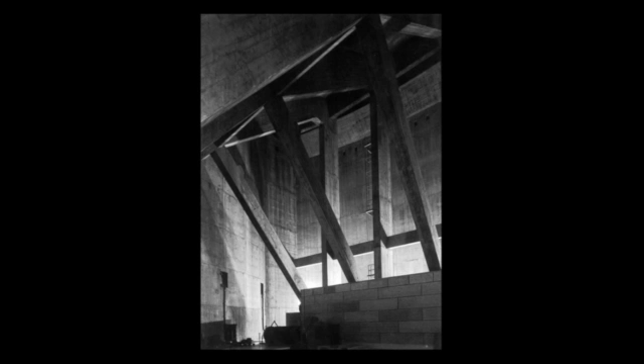And also this space here, which is inside a power plant, looks maybe like out of a movie from Josef von Sternberg, with these very strong black and white contrasts.

These walls, which are all bended, this one here is bended in a different way than that one, and this wall here is becoming a roof which is held on these massive columns. And it nearly looks like an expressionistic interior design.

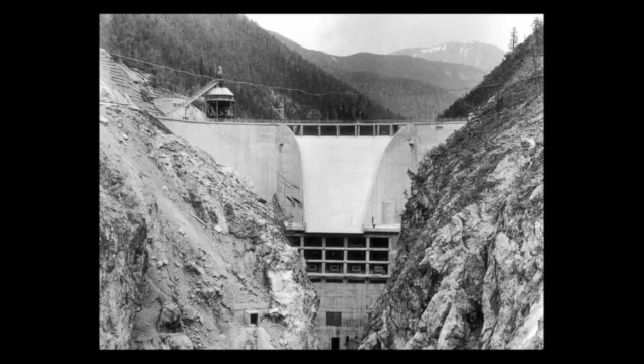But once again, there are totally rational rules why this interior looks as it looks. One is the wall on the back is the retention wall of this lake. And the other wall is actually like a waterfall, because if they have too much water, they will just drop the water over this engine hall, which is the actual power plant, built within or just behind this retention wall.

So this space is a pure consequence of totally rational, logical, economical decisions. But not only that, it is also giving a conceptual strength to this building. And this attracted me very much to these buildings of engineers. But I would say only the approach through these rules, or through the knowledge of what stands behind these aesthetical objects, makes them interesting to me.

These pictures were also done in the 80s in Switzerland, where there was a big debate about sensual architecture and about the perception of architecture. And then there were just very few private houses who kind of put this discourse into practice. Of course, this totally changed in the 90s and later on.

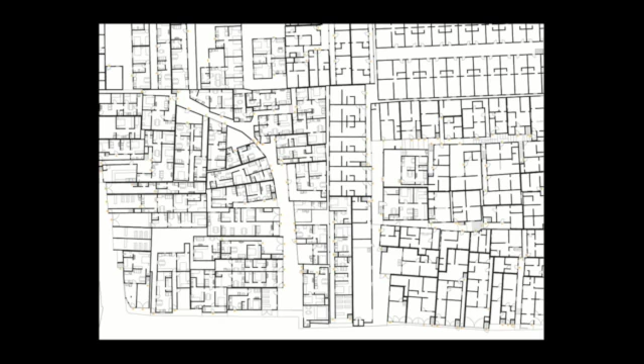How people living there organize themselves, how they organize the approaches to the house, and so on. So we are now studying and working on the question: what are the formal rules in the so-called informal settlements?

So, there are a lot of reasons why favela should not just be regarded as the reason for drug traffic and other social problems.

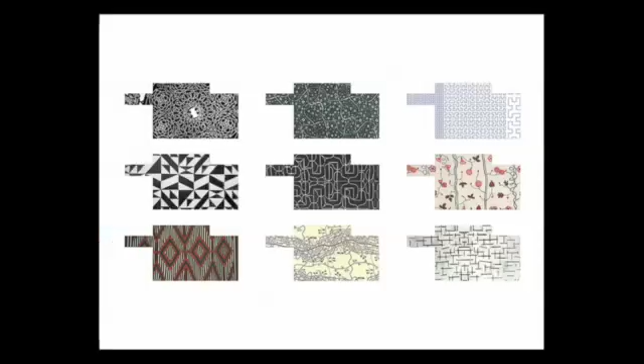Don't ask me why, so we thought in a different way about this social housing project. We thought it's maybe nice if these spaces are random, but they are connected and they could be repeated, like in an ornament of a carpet or a kimono, or in a painting.

This is from Mondrian, Joseph Frank. This is an ancient kimono, and the idea is that maybe the urban space could be much more organic or much more differentiated, but still follow a certain pattern, a certain structure.

This is how we started. This is more or less a study for density. Actually these are all single-family houses, which was not possible, as you can see here. So we introduced some houses where you have one apartment on top of each other, or also some apartment blocks.

And if you arrange them as you saw in this density study, you would get something like this, which, why not? It's also a nice pattern, isn't it?

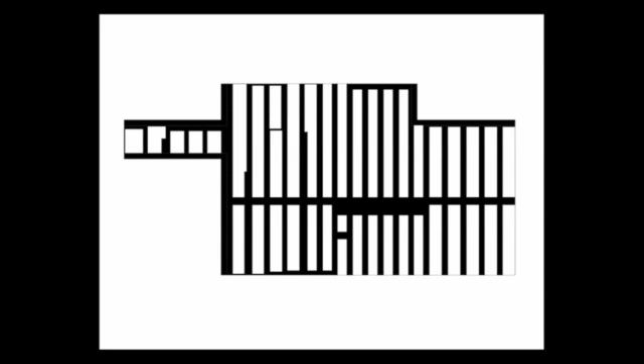But if you think of this pattern in terms of what could be the meaning of this outside space, and for example you think, well maybe these are private spaces, these are public spaces, then besides two or maybe three leftovers, you don't have a lot of variety. And you don't have a lot of generosity. Every garden would be very narrow and close to the next garden.

So we thought maybe it's nicer to have a different arrangement, like this one. I don't know how to call this order. Maybe it's not really an order.

But if you look at it, or if you imagine that this outside space could consist of private alleys, private gardens, public alleys, public squares, then you see that this option offers much more variety in spaces, and also offers more large open squares than the other order. So I would say there is also a clear advantage in this arrangement of houses.

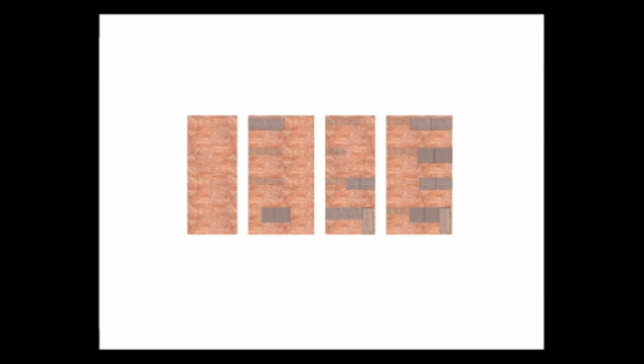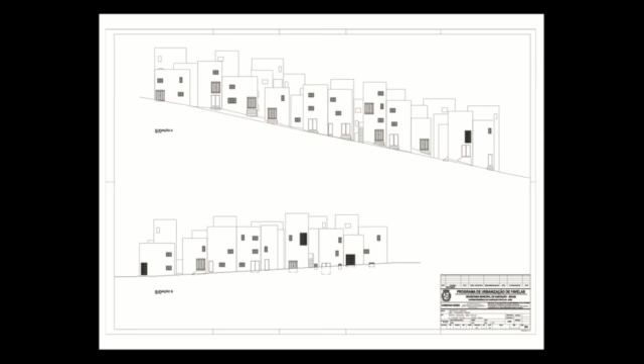Now we are working on the building application. This is a calculation for areas for handicapped people and for public squares. And this is a first impression of the facades. We hope to finalize this building application within the next 3 weeks.

And the area is very nice. There are a lot of trees and gardens. There are also some houses. They are not so nice actually. But...

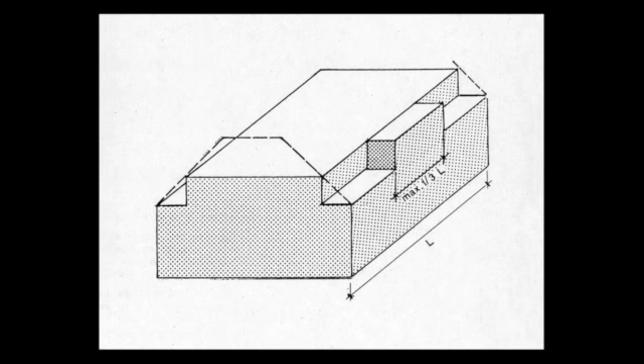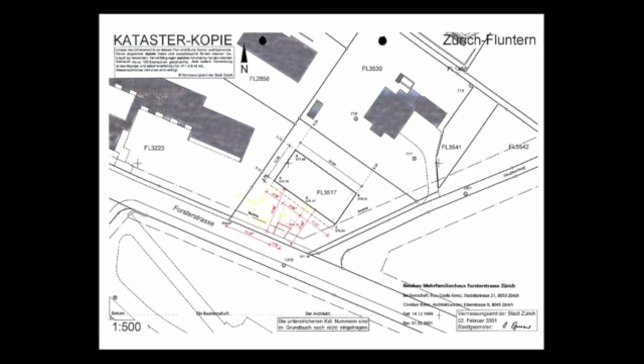This is the building application. The only choice we had was to make a rectangular form, like the other buildings, a box, and that the longer side looks to the sea, to the lake. And the whole design actually became like an interior design because the shape was given.

So the idea was to not stay within these boundaries and accept a given volumetry, but to not think of this house as a volume at all, but just as a structure.

One of the rules for this house was also to kind of escape the given boundary in many ways, not only by not having any facade made out of massive walls but only made out of glass walls, but also to have the biggest extension possible in terms of views, so that you always see through the entire floor plan in every direction.

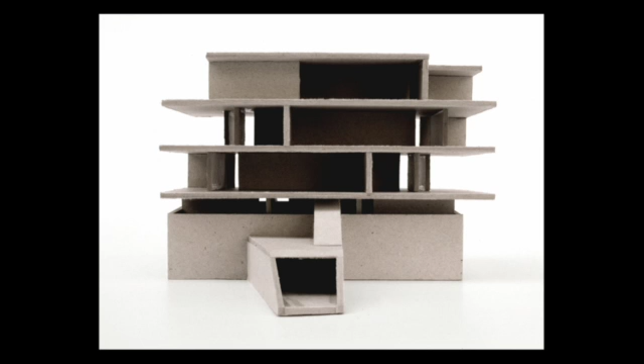And it also became very difficult work for our engineer. Actually, we had to change engineers 3 times. But now we have the best. His name is Joseph Schwartz, and he was really looking for challenges.

Since we didn't want to implement any other elements in this design, just walls, there was a structure where, for example, in this huge room, which is 12 meters long, you would need a column, but you don't, because this ceiling is hanging on this wall, and this wall is extended from this wall, and so on.

So all these walls are connected with each other. If you would change the position of one wall, you would have to change the position of all the other walls as well.

The floor plan which interested us the most was the cellar. Not because it is very important in terms of program, but because at the bottom you had a garage, and on top you had these apartments, and the big question was what to do in between.

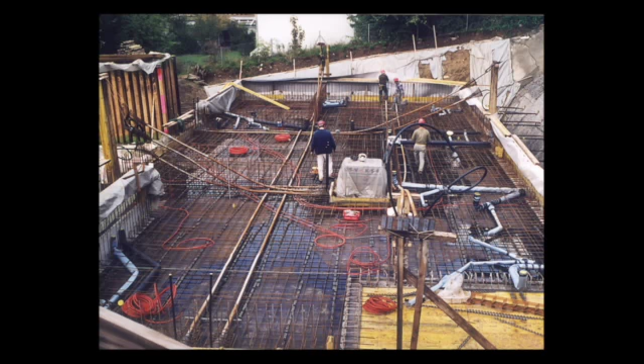And the cellar in this house is like a hanging bridge over a void space, so that this structure of slabs and walls is like put on the inversion of a podium, of a pedestal.

You see here all these pre-stressing cables which were important to hold the walls and to stick it to the outside wall. And the cellar was also like the breaking point, where maybe this house is not anymore faithful to its own rules, and it's just, let's say, decoration of what you see on top, but you don't think about what is really the basement, the fundament of this house.

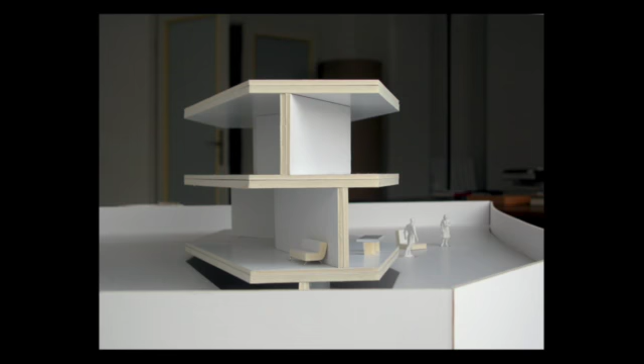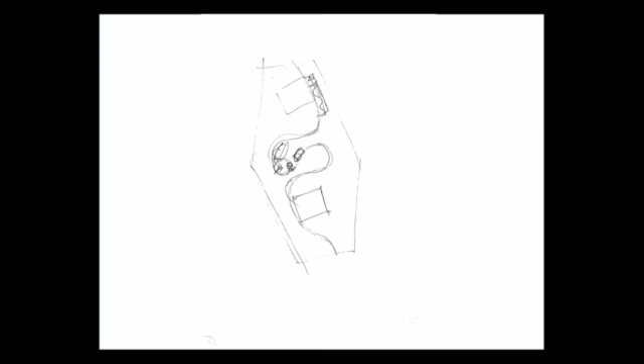You could even say this project is so simple, you just have to draw a line and then it's finished. So I was hoping somebody would do it for me. This is one example. Maybe a curved line would be nice. But then there's a little problem: a fire escape stair can never follow a curved wall, so it doesn't work. Nice, but it doesn't work.

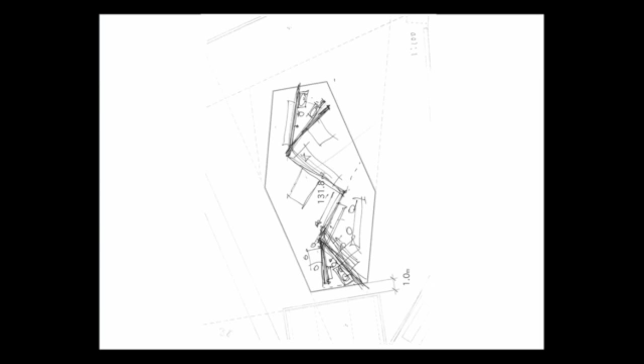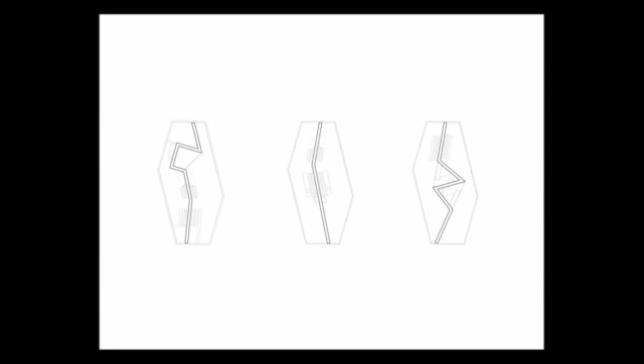So we thought maybe it would be interesting if this wall didn't always just cut the house into 2, but was more elaborate. But then these spaces were too small to be useful. And so on and so on. There were dozens of variations just of this one line. In the end, this was the floor plan after, I don't know, 3 months I think.

This is the living room, which we thought should be the most generous space. So the bending is the slightest possible, so you have as much space as possible. But of course, because it's a small house, it's only generous in 1 dimension, not 2, not 3, just 1, the length.

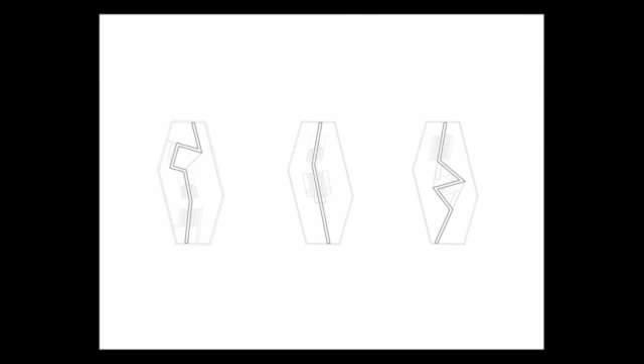This floor plan was very different because it also had to find a place for the bathroom, here, which is a niche in this wall. These 2 floor plans were pretty clear for me, how they had to be. And the third one, at the end you have a technical space, some storage room, and the rest was just the rest, and the beginning of the house. Maybe the most important thing was the stair.

This is the last model we did, at a different scale, not 1:33 but 1:10, and instead of 2 kilos, it's 800 kilos. This is the outside, just some cladding with aluminium panels, where you have the structure, and the rest is sliding doors.

So in this design process, the most important instrument to create generosity was the staircase, connecting all 3 levels. The walls are always in the same position, next to the staircase. This is also, let's say, a very monumental gesture and perspective in an otherwise very small, very modest house.

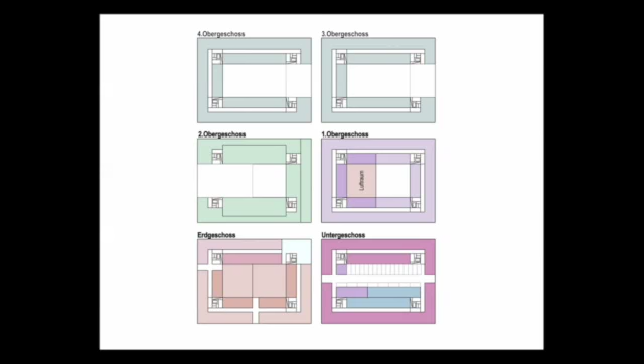This is the feasibility study that was given, and this is also how most competition projects in Switzerland look like. But not this one, I must say. There were a lot of very interesting entries.

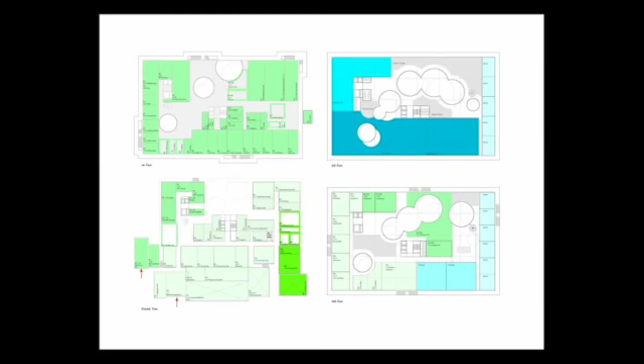So, as you can see, on the ground floor you have different workshops, and you only have very few openings. Then here you have research laboratories with already, let's say, 3 or 4 zenithal light wells. And then where you have the big auditorium, they are all put together in one area. So the position is always different from one to the other, and this also has functional reasons, so that we could implement, besides the given spaces, also open spaces where people could meet, also around these light wells.

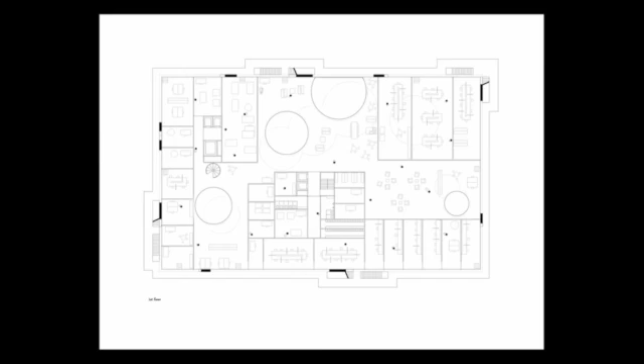This, for example, is the first floor for the management with meeting rooms with zenithal light.

And the structure is extremely simple. You just have pendulum columns on the inside. I show you this structure in a movie. Basically, it's just slabs and columns, that's it.

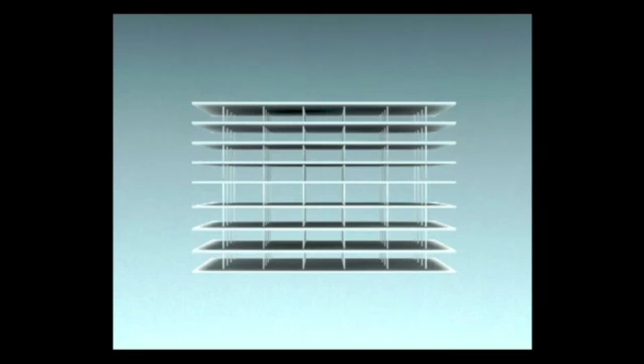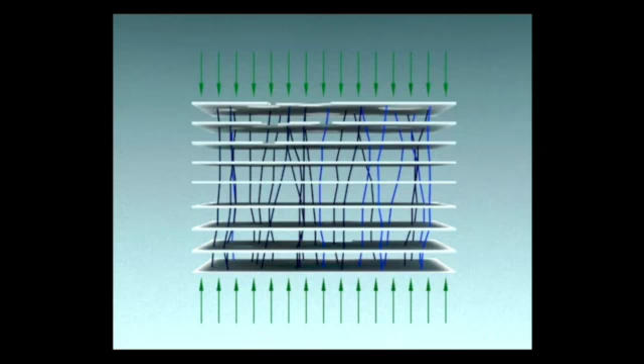But then you have these holes, and because of that you don't have any more straight columns. And because of this inclination, we thought it's better to have pendulum columns. But of course, they cannot stiffen the building. This is when the wind would blow.

So we thought we need also some columns on the outside, but these columns are totally different. They are massive, they are connected with the slabs, and they are also inclined, but for a very different reason. Here it's important that these columns meet in several points, because the more points you have where these columns come together, the more you can reduce the size of these inclined columns. And they also follow the direction of the fire escape stairs, which is outside the building.

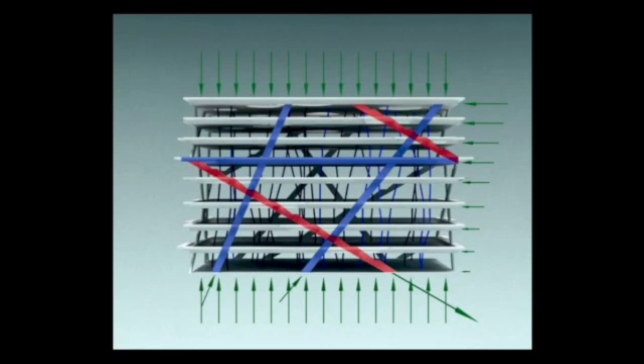This was one day before giving in the competition, and then we got a phone call from Schwartz asking if he could visit the office. We were quite stressed, but it turned out that we had a very distracting discussion about how irrational this project is that should actually be a Swiss engineering building.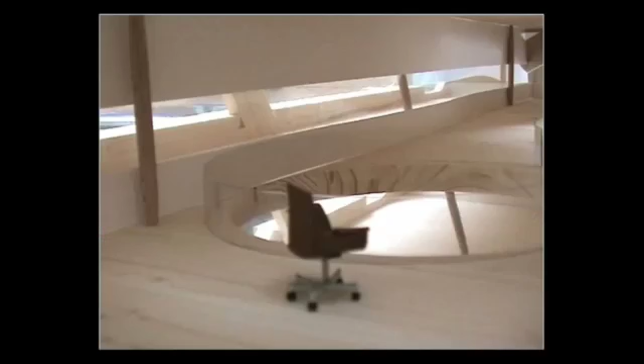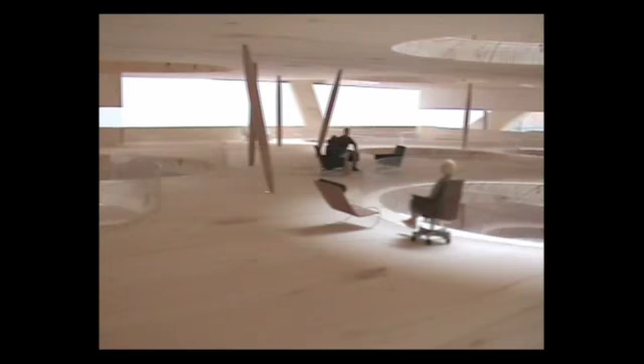And I totally agree, but I would say there are 2 elements in this project. One is the basic structure of columns and slabs, which is basically a very rational system, but then you have these holes, and these holes are totally weird, it's like if you shoot with a shotgun through a rational structure. But I think it also opens different perspectives in an otherwise very rational building. And I wouldn't know which aspect matters more - the rational approach of just slabs and columns, or this Baroque or surreal aspect of the building.

These are some camera movements to show how this space would always change the perception if you would move around it. They were done in very short time.

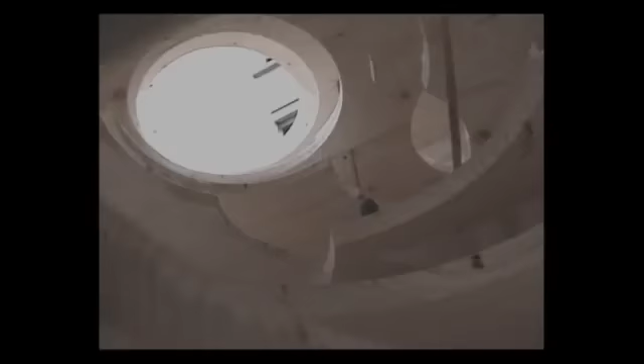But since I believe that you never can really know what the building will look like in reality, I hate renderings. I think these very rough sketches of the interior are maybe more faithful because they don't pretend to be reality. And it also gives a variety of impressions on each level of the same building.

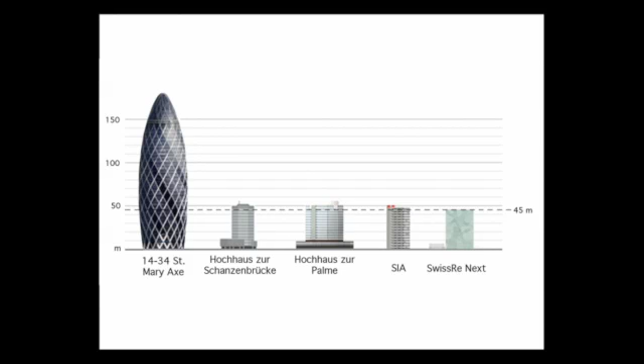But actually, what I wanted to do is this. This is from the same company, Swiss Re, a building in London by Foster. I don't know exactly what the symbolism is of that. But anyway, if you imagine that this is kind of not the headquarters, but this should be the headquarters, it's very much a challenge - how could this small building become more important? I mean, scale is not the only thing.

So I thought it would be nice if we have on the exterior a structure which is not just one slab after the other, but which is a structure that goes over the entire height of the building, a monumental order, not an order given by these slabs. And also not an order like in other buildings that is just on the outside, just a structure of the facade. No, I thought it would be nice if this would go inside the building, and then I put these nails into the foam glass, like a voodoo model, hoping that something comes out of it.

We actually thought there is one element, and this is the core — the staircase, which you need in every building — which could develop from one facade to the other, then be reflected and turn again till it reaches the last floor. It's like if you play pool and the ball is reflected by the borderline, because the stair cannot go out of the building and then come back. So it has to turn here. But this is the biggest possible extension you could have with a staircase.

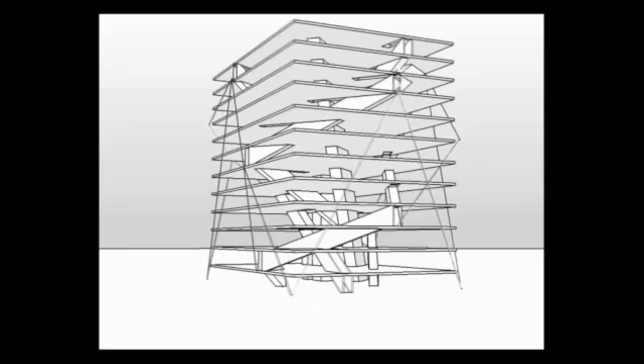I think, yeah, we decided for that one. I think it was the fire police who made the decision easy, so it's also not an aesthetical decision.

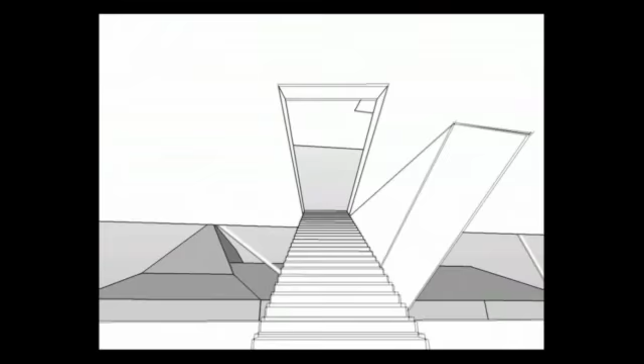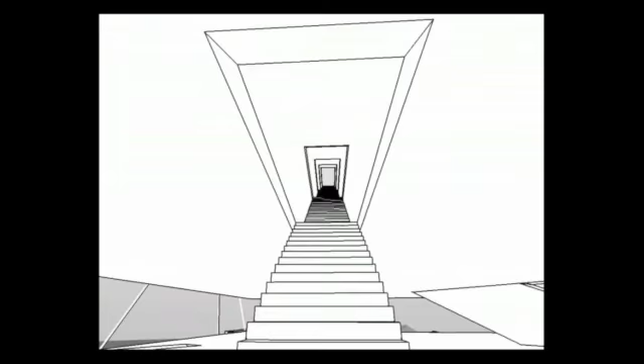Basically it's a very old principle where you have cores and then suspended wires on the outside, but here the cores touch the facade only at the last level. So the suspension wires are only in the facade, which is much nicer than all these 60s buildings. And if you are the manager of Swiss Re, you have a nice walk each morning — it's really like a promenade architectural. With a lot of training, you would have this speed.

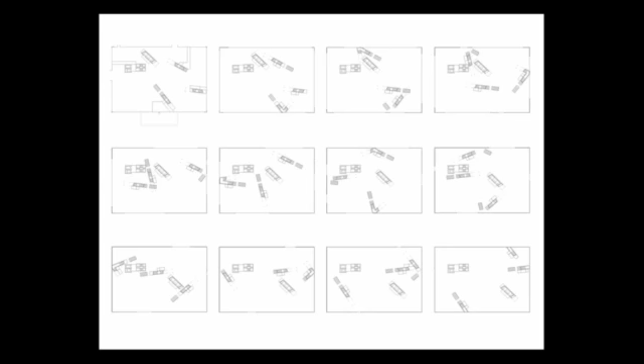Besides that, each level is different because the arrangement is also always a bit different. Each slab is like a fragment of the entire structure.

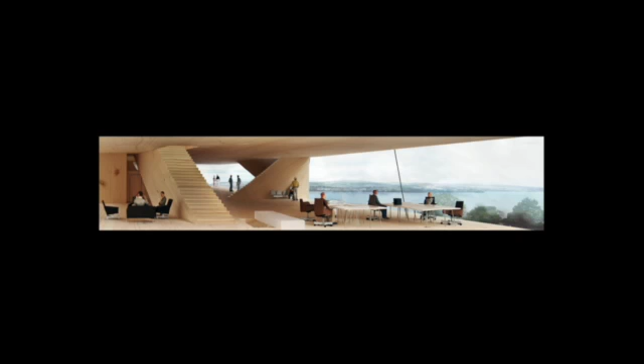That was again the model at 1 to 33, and you see here the steel wires holding the slabs at the exterior, which would allow you to have a view over the lake of Zürich without any disturbing columns. This totally open view would relate to this very heavy cores in inclination.

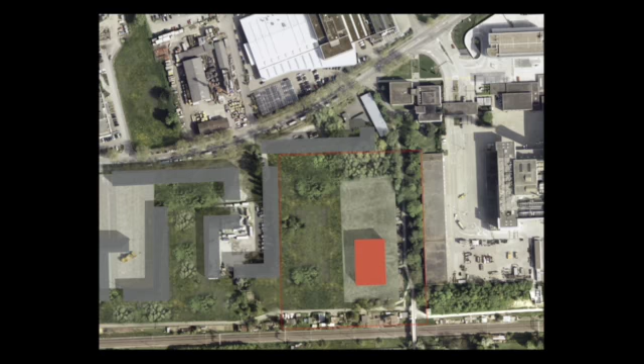The site of the school in Leutschenbach was actually, at the beginning, huge, and the neighborhood is quite rough. You have a power plant that burns trash, a speed train and traffic and so on. The only quality was that it's big, and to kind of keep this size, we were thinking of a way to connect all parts of the program with each other.

In one entire gesture, this steel structure already indicates all the parts of the program that you have. On the sides you have the classrooms. Here is the entrance with the cafeteria. Here public rooms, auditorium and library. And on top there's the gymnastics hall. They all depend on each other.

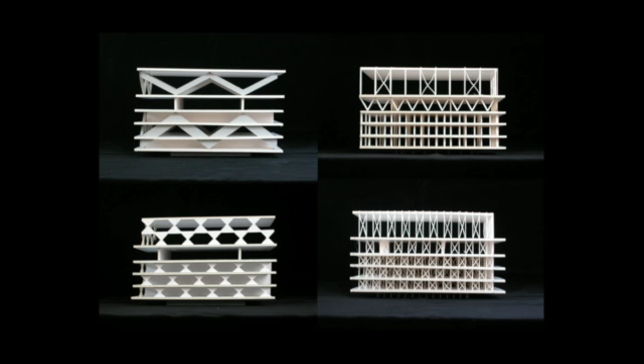It's not like a collage where you have a different scenography from one level to the other, but just a differentiation in space.

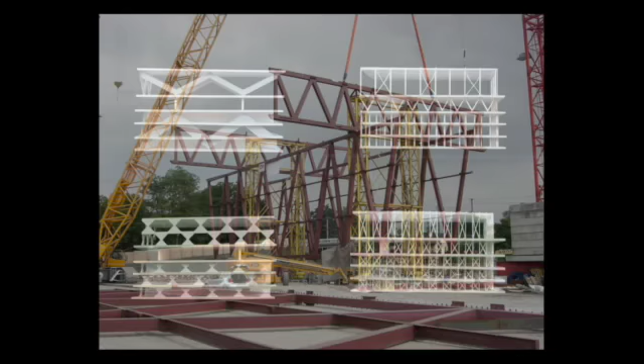And these were studies we did when looking at how to bring the facade closer to the structure. So even if the program was given, it was a long research to come as close as possible to this given arrangement of space.

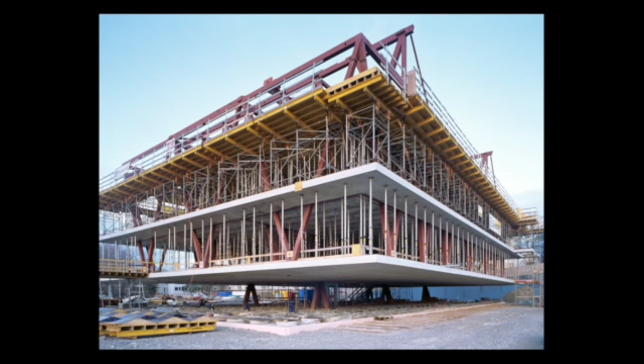The structural model is not just an invention or a diagram — it's also a built reality, as you can see in this picture. The slabs of the first 3 levels with the classrooms are hanging on the 4th level, so that the entire surface is open to the outside from the entrance level.

Yeah, it still holds. So this is the ground floor, also the lowest ceiling, just 2.50 meters, so that you can feel the weight of this building and have a stronger relationship to the outside.

The school has big halls, and each classroom is entered through a hall like this. In the middle is a double-sided staircase which separates the area for the smaller and bigger children.

It's all done with the same material — all the slabs are concrete, all the walls are translucent glass, even the handrails of the stairs are done with the same material. But this is not a question of taste. This is not minimalism — it's more to enhance that the difference between the levels is the space.

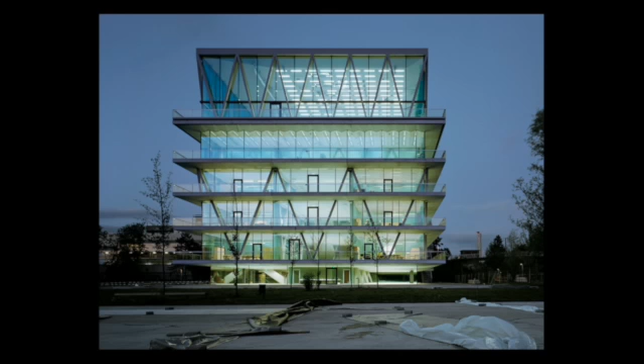So it's evident, even after construction, that this is a building made out of steel. You could not do it with any other material. This becomes evident not through any sensual aspects, because the surface of the steel is covered with grey paint, and the grey paint is exactly the same grey as the concrete, so that we could avoid any sensual decision.

And the neighbors, they love it, the kids love it, Swiss architects hate it. I actually ruined my career in Switzerland with this building.

So maybe some rules if you ever work in Switzerland. First, it doesn't matter how expensive a building is, it just should not look expensive. There are 2/3 of school buildings in Zurich which are more expensive than that one, but the problem is it looks expensive. So there are rumors it's 3 times more expensive than what it should be.

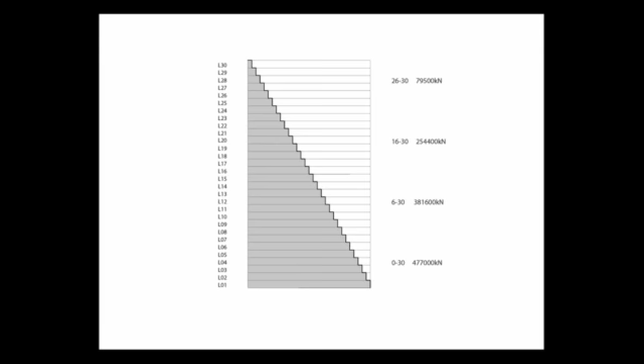And this is a diagram, and it shows the weight of the building. This is the top floor, so this is the weight of the building on the top floor. This is the ground floor, and this is the weight of the building on the ground floor. So with the height, the weight of the building increases. Very simple—it's a simple rule of the game.

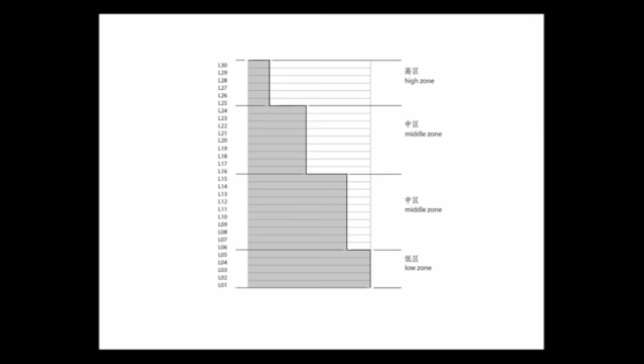Of course, you cannot change the structure on every level—that's just too complicated. But we had some given zones by a master plan, so we thought it's maybe nice if we have a structure in this high zone and then another one in the middle zone, etc. So we have columns which start here in the high zone, go down here, and then we have some additional columns just in the lower area. So instead of increasing the dimension of the column, we increase the number of columns.

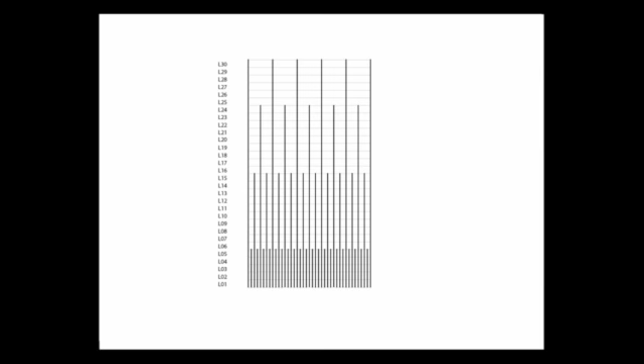And as a result of that, you can make a high-rise building with very slim columns, like 35 centimeters, which for 120 meters is quite okay.

So to keep this dimension, we thought it would be a shame to implement a stiffening core inside the building and make it massive again. So we thought it's maybe nicer to have like flagpoles—to have wires on the outside of the facade.

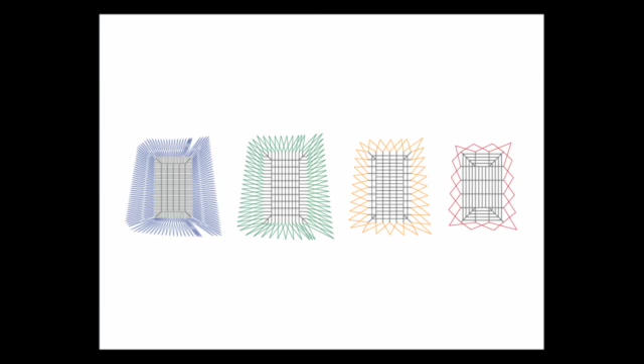And then again, for each zone, for each structure, you not only have a different grid of beams, but also a different net of stiffening wires. These are all the nets there are, and this is how it looks if you put them one on top of each other. This would be the perspective from the airplane.

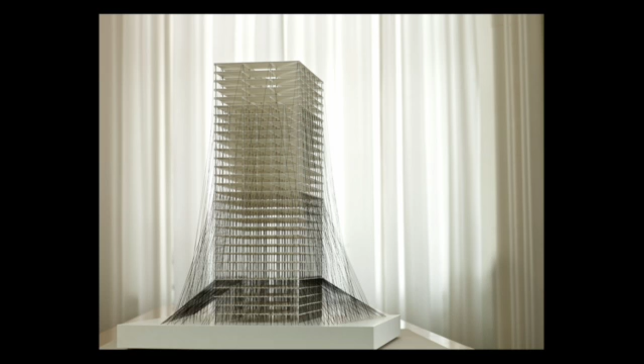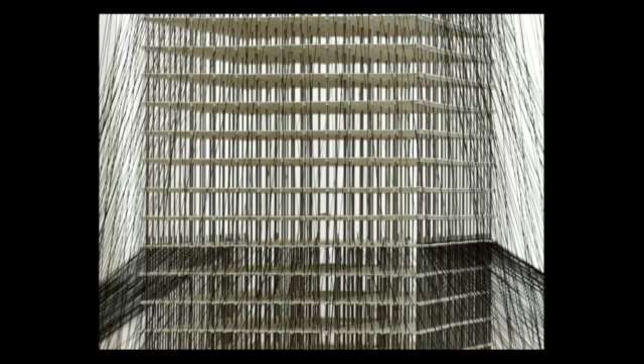And we made a model. You see the density of structural elements changes with the height.

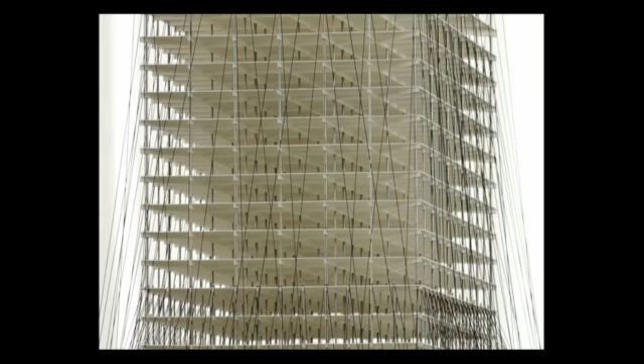In this sense, this is not an invention to make an iconographic building or so. This is just giving evidence to what there is already, that you have different conditions here than here.

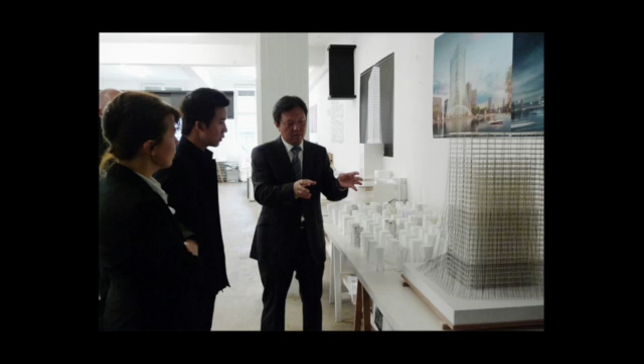This is our client. Actually, it was on the lottery day, so I unfortunately missed it. He was working 8 years in Japan, in the office of Kikutake. I'm very excited how this project will go on. We have to make some changes within the next 6 weeks.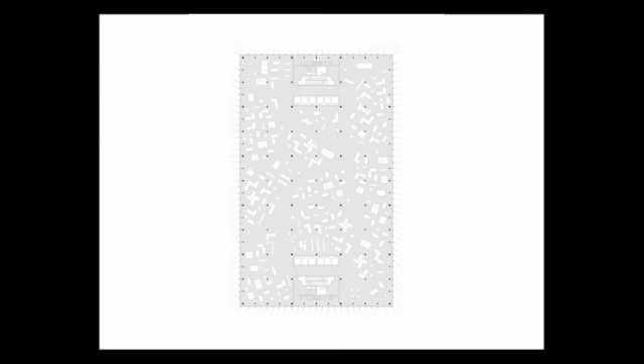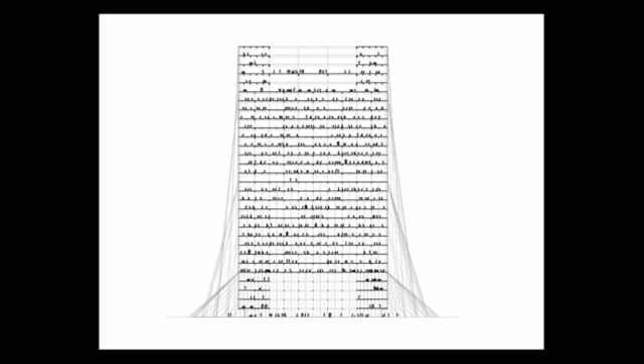The other thing, since you don't have a core in the middle, you could also have a huge reception hall here, with some retail around it. You could have an open atrium on top, a big auditorium for a couple hundred people. And the structure is very simple, like a tent from a circus, just in a different scale. We did a little movie to illustrate this concept.

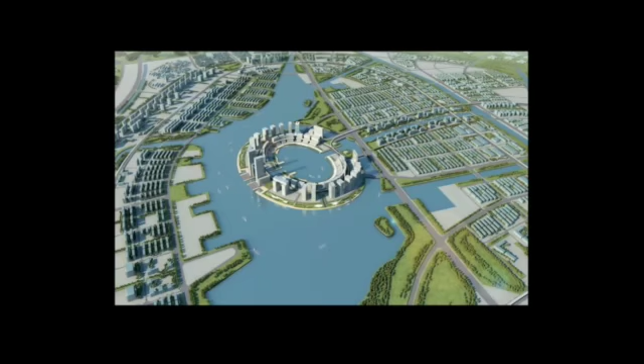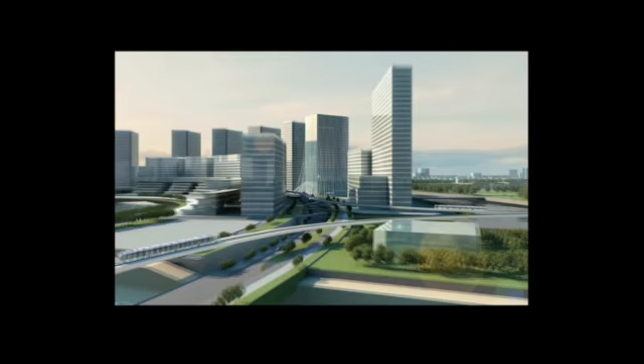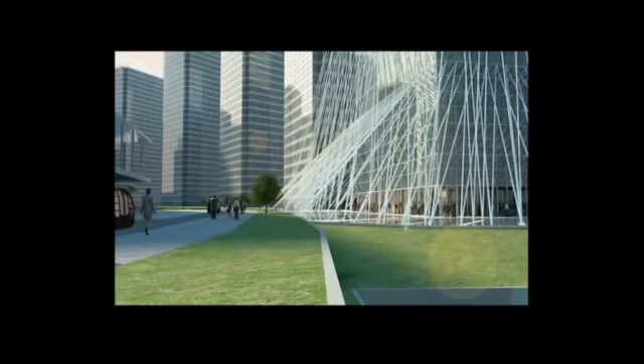This plan is from Kurokawa, and now Isozaki is actually the head of the planning committee. It's like the Forbidden City, like an island, but in the middle there is again a lake, and there is a specific transportation system.

What I like is that there is an outside space, just when you enter the plot, even before you enter the building, you are underneath this ceiling of wires, and you are in a space in between street and house. And then when you enter, you have this open hall.

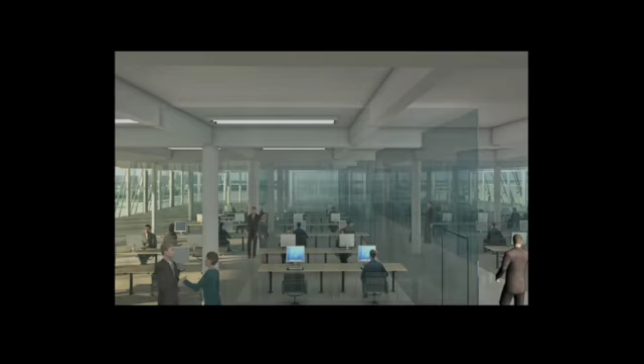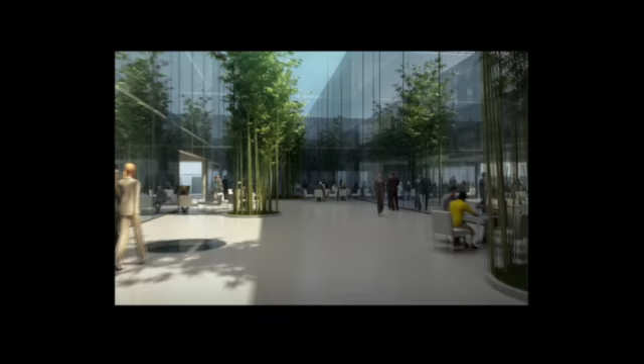All the elevators could be glazed. This is a view from the elevator. We imagine all the offices are also glazed - at least it's possible. And this is the atrium on the 27th level, surrounded by the bar and cafeteria, which gives you a view over the surrounding area.

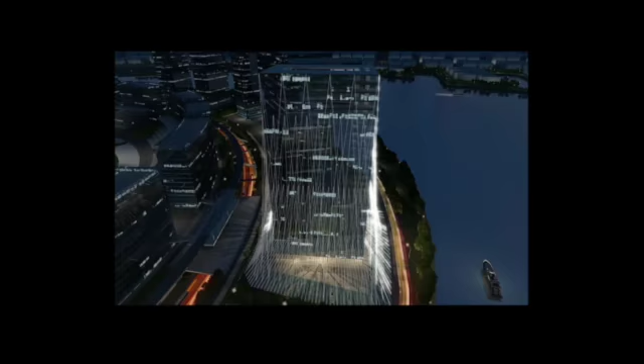And these wires might also be interesting for the illumination. We have 3 concepts to choose from. The first was called waterfall, the second light ball, and this we called robe or dress. Nice, huh?